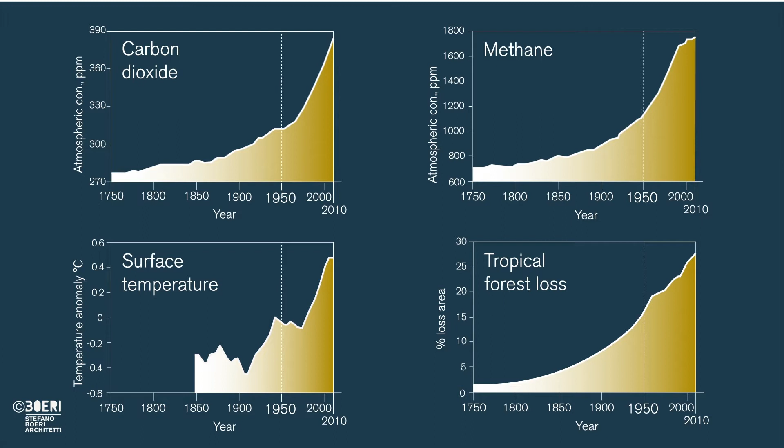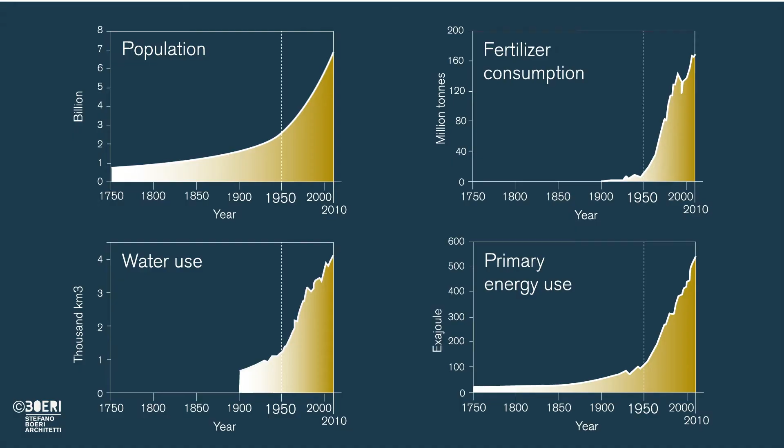As we all know, we're too many. We're consuming mostly everything, and over the past 50 years we've done it in a way that is not sustainable. In the 50s, 29% of the population was in urban areas. By 2050, we're going to be 68% of the population living in urban areas.

So the world is facing not only exponential growth of population, but also the challenge of understanding how this 3% of the world's surface—referring to the surface above sea level, the dry surface—can be rendered sustainable.

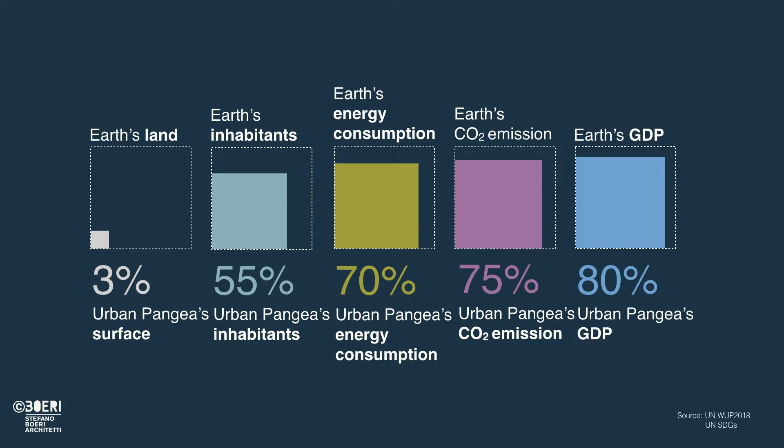What's happening now is that 55% of the world's inhabitants are in urban environments. We're consuming 70% of the world's energy, producing 75% of the CO2 emissions. Worst of all, most of the economic activity of the world is actually in urban environments.

This turns the city into something that is actually a resource. As we see it, it's the place where we have to start—where we can begin healing the planet and turning the environment into a place where we can all coexist.

What we know and what we do is that we don't simply use green as decoration. We treat it as a being. We try to understand its potential, and we try to increase that potential.

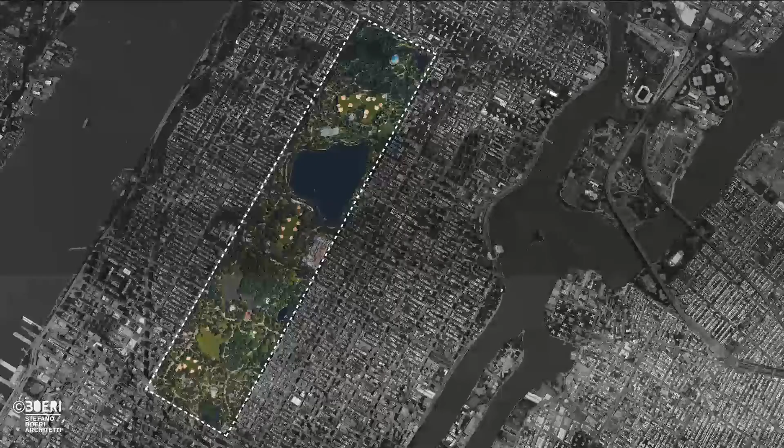A mature tree planted on the ground can absorb 0.4 tons of CO2 per year, can produce oxygen, and can gather water. If we take Central Park, for example, it has 20,000 trees. The Bosco Verticale has 800 trees on its facade.

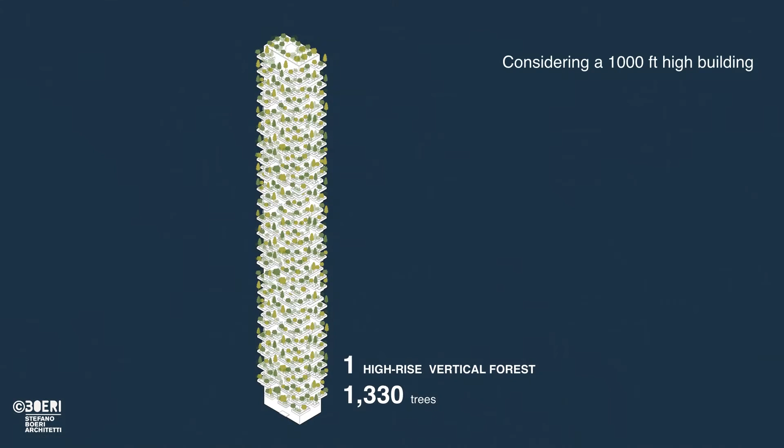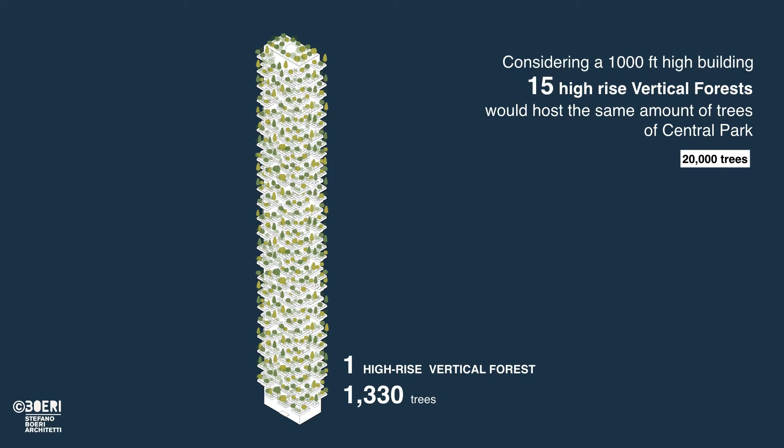If we think of making a tower as tall as the high-rise towers in New York, we can estimate the amount of trees that could actually be on that tower. By building only 15 high-rise buildings as tall as those in New York, you can have the same proportional amount of trees as in Central Park. So you don't really need a void as big as Central Park to increase the green environment within the city.

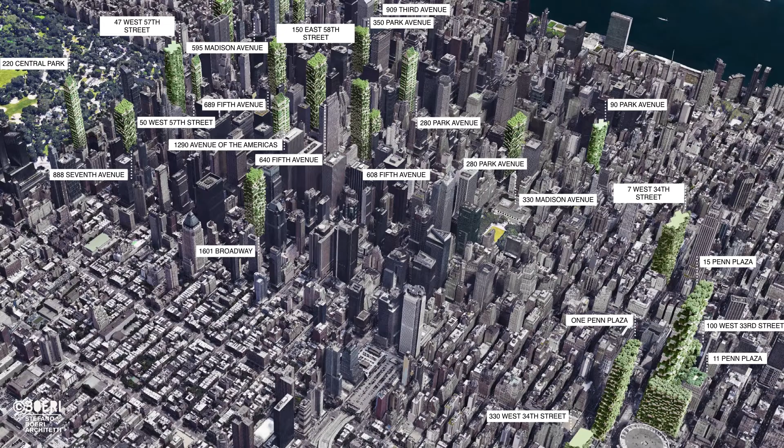So what we've been working on for several years now is a call for trying to bring people to think of ways to turn our urban environment into a green environment.

This is the example we all know, and it's where everything started. In the vertical forest project, architects, engineers, an agronomist, a landscape architect, and many others came together to render this thing possible.

It was a work of research, but most of all, we need to thank our client who gave us the opportunity to do this, because the first reaction we got was, 'You're crazy.' We were speaking of putting trees on the facade—not bushes, not small plants, but actual trees. The Bosco Verticale hosts trees ranging from 3 to 9 meters, so we're speaking of a structural effort and many other efforts to render it possible.

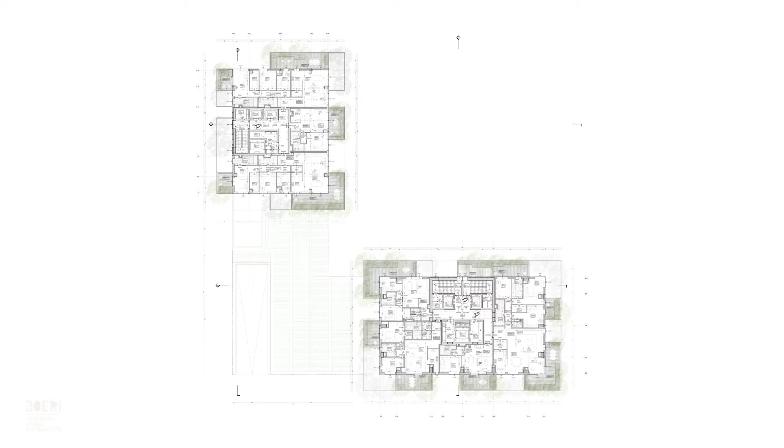It hosts 800 trees and a number of other shrubs and species that rendered the ecosystem sustainable, because we had to find a way of rendering the whole system sustainable, one that could endure and last after a few years. And actually, until today, nothing has died.

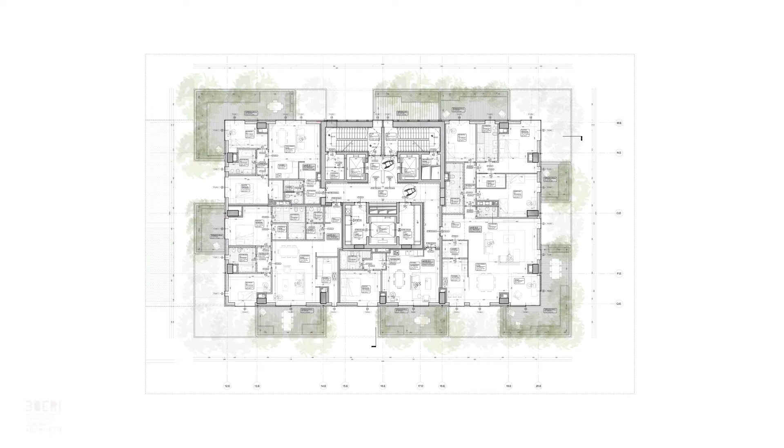So the whole exercise, from the architectural point of view, was to find a balance between the human environment and the natural environment, the house for the tree, so to say.

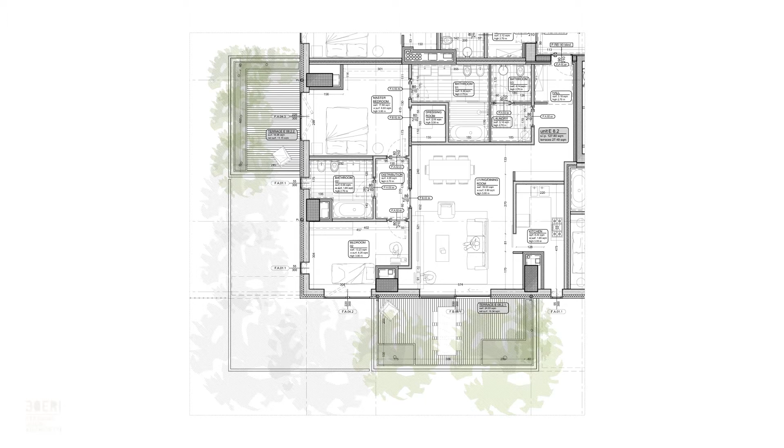We had to understand the dimensions, the distances, the needed space that a tree needs in a built environment. That made us come up with these huge cantilevers you see in Milan, which are the minimum distance you can have from the trunk of the tree to the facade of the building, so both can coexist. We can guarantee the tree is not going to grow in an impossible way, and that the building is safe itself.

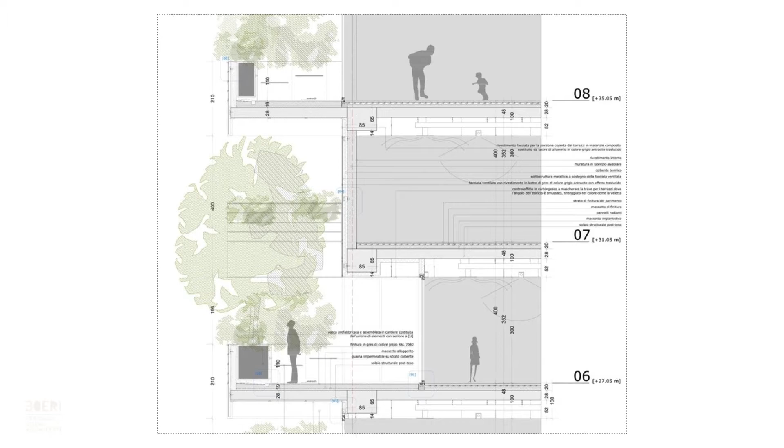That all brought us to this section that I think all of you have seen. If not, here it is, which was the result of many studies where we had to understand things like how the building behaves when there's wind, because it's a 100 meter tall tower.

What could happen if the trunk breaks, how to deal with the watering system, from where to get the water, which is always an issue, and how to calculate the whole system to make it sustainable, economically feasible, and to meet a budget, because we all work with a budget, we are given a number and need to stay within that number.

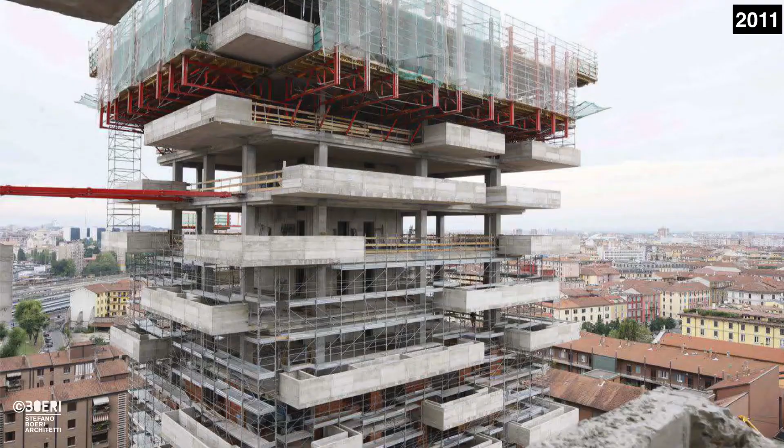So, structure. This is a picture of the building when it was still under construction. The structure is cast in place, a post-tension structure, calculated by Arup. And the fantastic thing about it is that it's as slender as it could possibly be.

So all the pots placed on the edge of the cantilevers are actually not rendering the structure heavier, but the opposite.

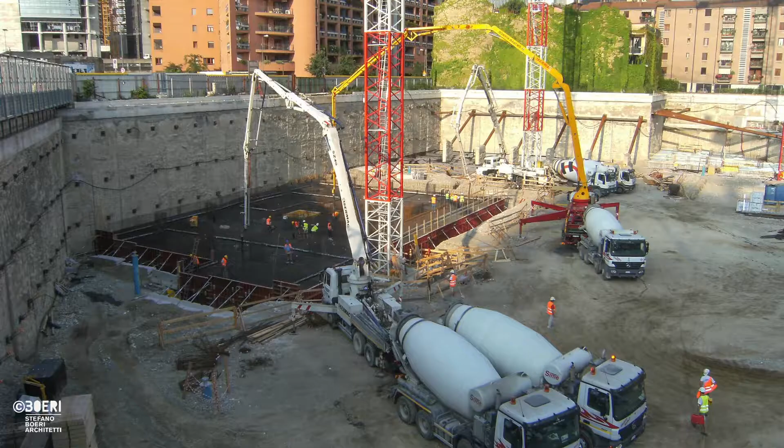Then there was another thing we had to take into consideration during the project: both buildings are seated on top of the metro tunnel. So there were vibrations and other things to take into consideration while building up the whole system.

One final thing we had to take into consideration is the fact that Milan is sitting on water. That was actually an opportunity, a positive thing, and I'll explain why.

So we get to the building itself, the facade. The facade is made by trees.

The exercise was to understand which kind of tree, in which position, how it's going to be planted, the kind of soil that was going to be used, and the fact that we had to use lightened soils so as not to render it heavier on the structure.

Then there were effects like: part of the facade faces north, so there we used trees that are evergreen... that lose their leaves during winter. On the south, actually, are evergreen trees, because there's a need for sun protection throughout the whole year.

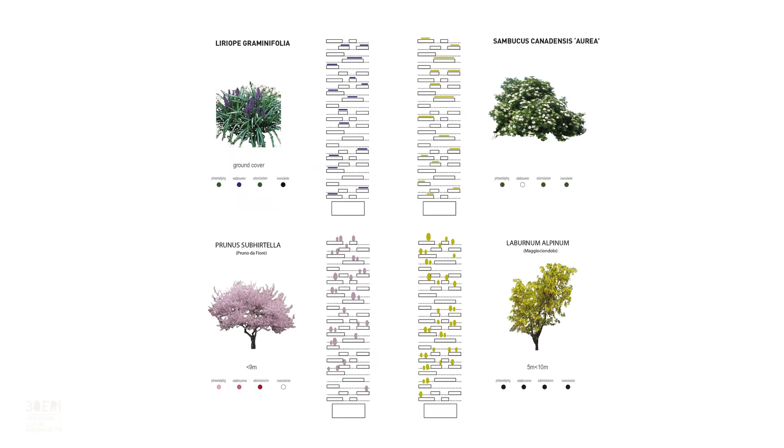Then there is the fact of the wind.

I was very young, but there was a test made in Florida on a wind tunnel to understand a few things about the tree: how it behaves when there's wind, the kind of trunk and shape of the trunk you have to have, and the amount - if the trunk has to be tall, small, fat, or not - because that has an impact on the behavior of the tree when there are strong winds.

Then, of course, there was the fact of how to bind those elements that were 9 meters tall to the structure of the building, and how to actually prevent it, if the trunk breaks, from falling, and other elements.

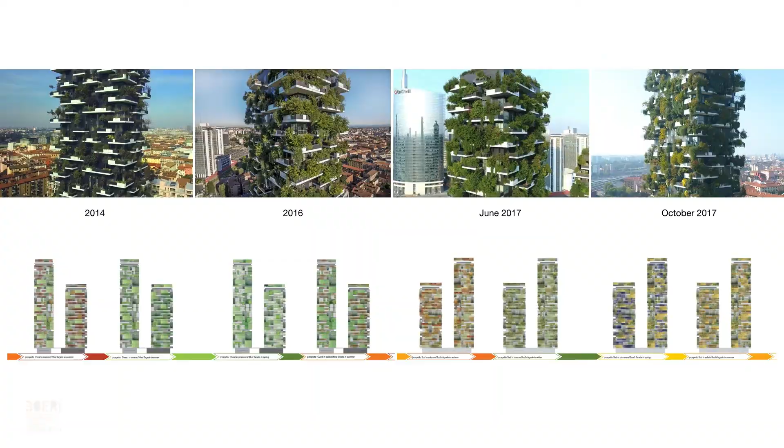As I said before, there was also a study of how this building behaved throughout the whole seasons. As you can see on the slide, here's how the building was in 2014 when it was finished, and how it was in October two years ago. As you can see, the nature is growing, still developing, and we haven't seen one tree fail so far. So how did we manage to put all those trees up there?

First, they were bred on air pots for nearly two years, so they are prepared to live in special conditions. Then, of course, all these trees were chosen one by one by our agronomist, Laura Gatti, and the choosing was made according to the size of the trunk, the height of the trunk, the leaves, and many other elements that, according to her studies, render them suitable for living in this kind of environment. After the wind tunnel trial, she also made some fluid studies of the wind that were then applied to the trees themselves, to understand the correct structure of the tree for it to then be chosen and brought to the building.

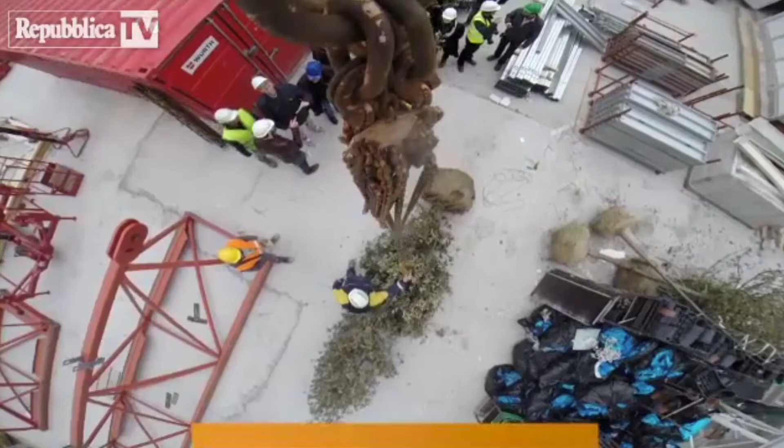So this is one video of the day in which they started putting up the trees on the facade.

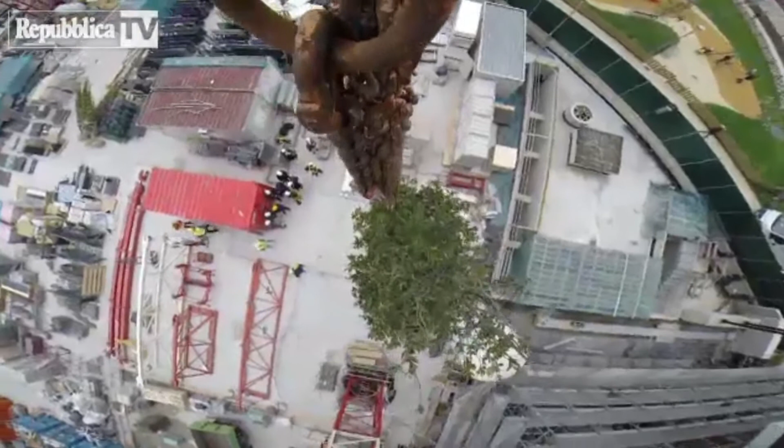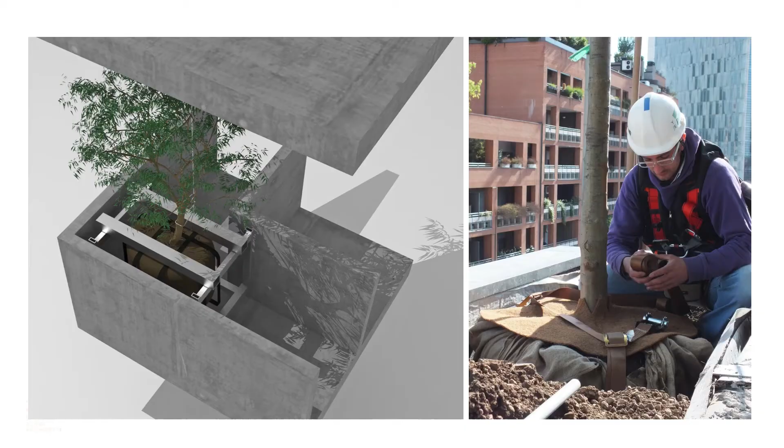And this is how the trees are actually bound. So from the wind tunnel, we learned the shape and size, but we also learned how to attach them to the structure, because there are many different aspects involved. Trees from 6 to 9 meters are bound to the main structure with cages, because we could not rely on the roots of the tree for binding them correctly. The mid-sized trees are tied to the structure with strings.

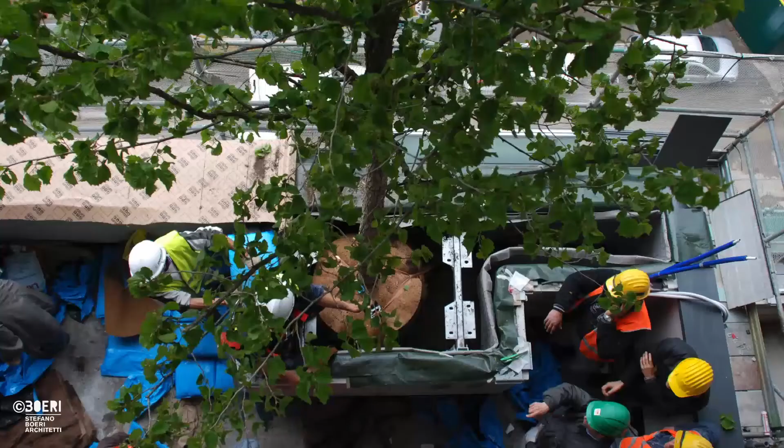Because we knew that the roots, in time, were going to be strong enough to actually hold the tree to the structure. This is actually a picture of one of the 9 meter trees put onto the building, and how it's bound to the structure with strings and metal elements, so it doesn't fall.

Then, as I said, Milan is sitting on water. That actually gave us the resource for the water needed for irrigation of the whole system. So what happens in Milan is that we gather water from underground, it's pumped to the roof, and then by gravity it falls throughout the whole irrigation system, which is a drip system that works throughout the whole year. It's continuous, it's not stopping.

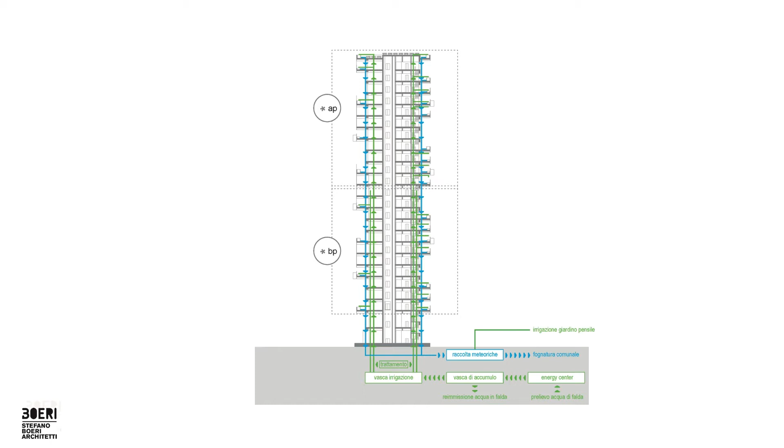And then, of course, together with the rainwater, it's all gathered again and put to the sewage. This is because in Milan, part of the soil water is also used as potable water, so we cannot put the water that comes from the trees back in - it's forbidden by law. That's why the water that is gathered afterward goes to the sewage. One of the points where water is taken out for potable use is quite close by, so it's an area where it's not allowed to put the water back in the soil. So the result is this.

It's a building that works pretty much like a tree itself, creating this kind of atmosphere. It's a place where there is living nature. There are animals, nearly 20 bird species living in the building nowadays.

One interesting thing is that at some point there was some kind of imbalance in the ecosystem that was created, and some bugs and elements where we had to bring them to the building to then balance the whole system again.

And of course, then there is the question of maintenance, which is the big question always. Because there were many moments it was said maintenance is quite expensive. Fact is, yeah, it's expensive, but it is expensive because it's a luxury building. We're speaking of a building that has a 24-hour doorman, spa, gym, and many other things that render it expensive. The greenery, the maintenance of the greenery in the building is only 10% of that cost, so it's not that much.

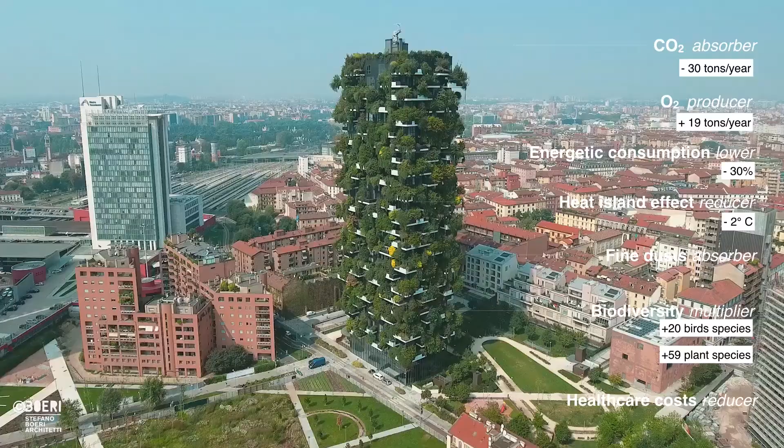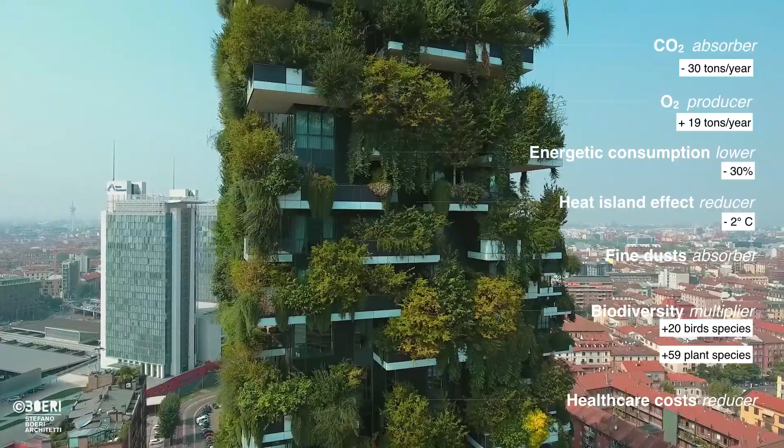So this is the building nowadays, and these are some of the advantages of doing something like this. You have a building that absorbs CO2, produces O2, reduces the energy consumption of the building, reduces the heat island effect, multiplies biodiversity, and above all, it's proven that people living close to green environments are actually healthier. So what you have are the benefits of living close to nature within an urban environment.

So we get to the point of what happened next. What happened next is that we are nowadays having projects all around the world. The approach is pretty much always the same. We take a look at the client request, the environment, the climate conditions, the species that are native, the species that can be introduced, the species that can be reintroduced into the environment.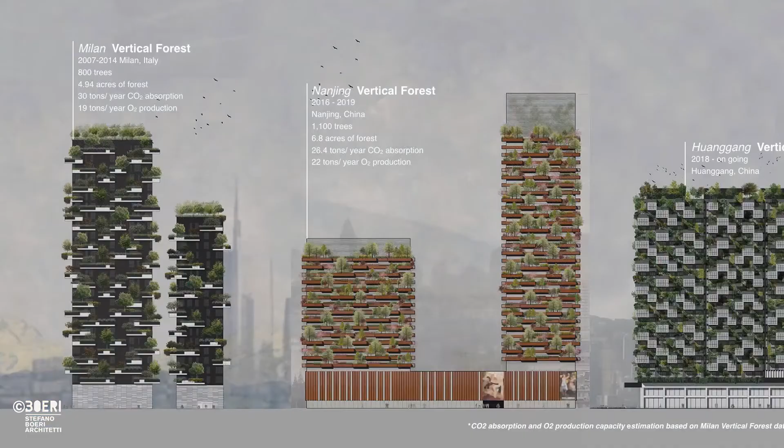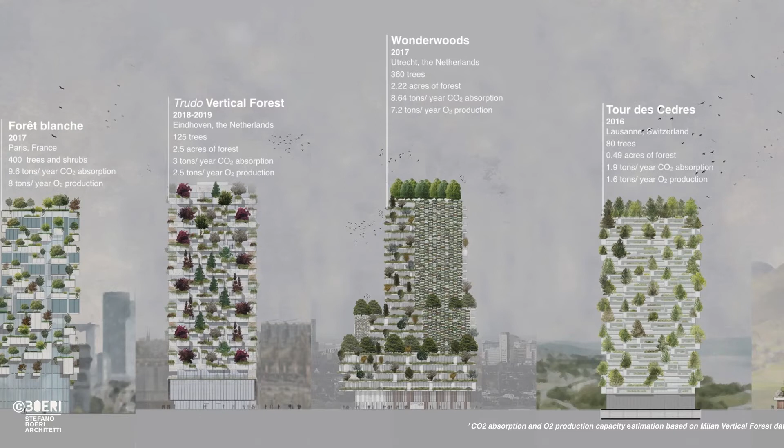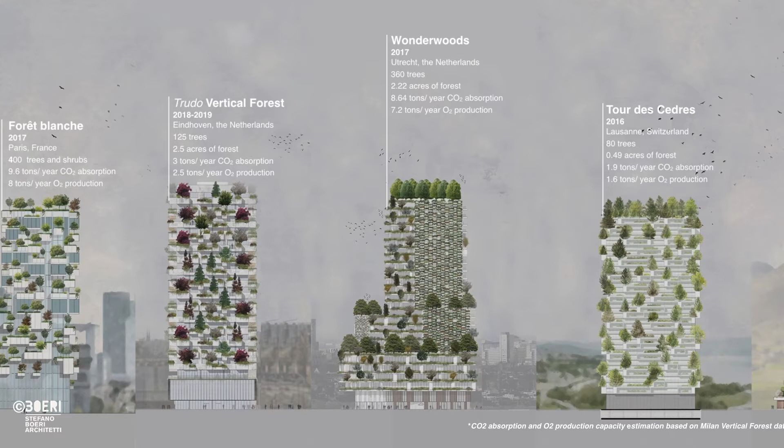And with all of that, we shape buildings that are actually capable of hosting nature. So these are not all the projects, but quite a few projects that we have ongoing now in the studio. Most of them, or a few of them, are actually in China, which is an interesting place because it's starting from zero. So there, from what we've been told, you don't only go there and pick the trees that are going to be in the building, but you need to tell them how to do it. We have to kind of teach them how to grow the tree, how to breed the tree, how to actually prepare the whole technology to then make it possible for it to be built.

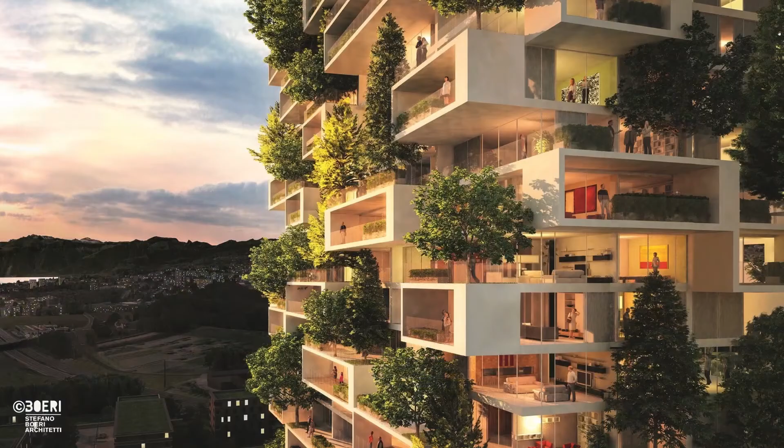The examples brought today, of course, are examples here in Europe, which are quite different among them. So one of them is the Lausanne Tower. This is a competition that we won. It should be built one day.

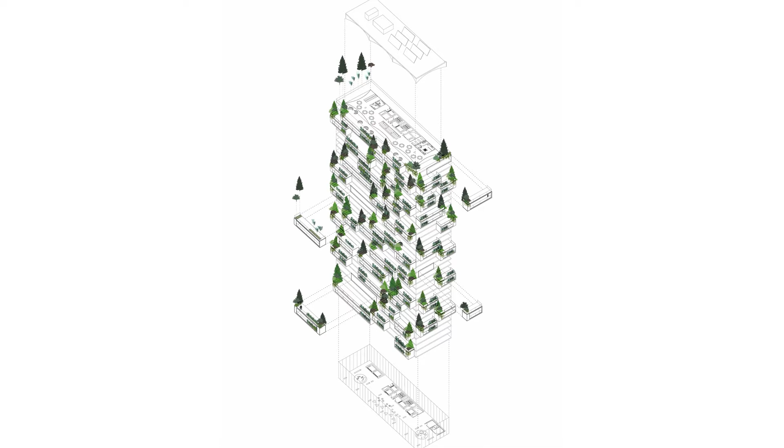This building has a number of trees. The fact is that here the request from the competition was to have large views. We had to create houses that had to look over the city with no barriers. So that brought us to think in a completely different way of actually holding the tree or creating that space for them. These are the species that were chosen, which are all from the area. And then here is the structure.

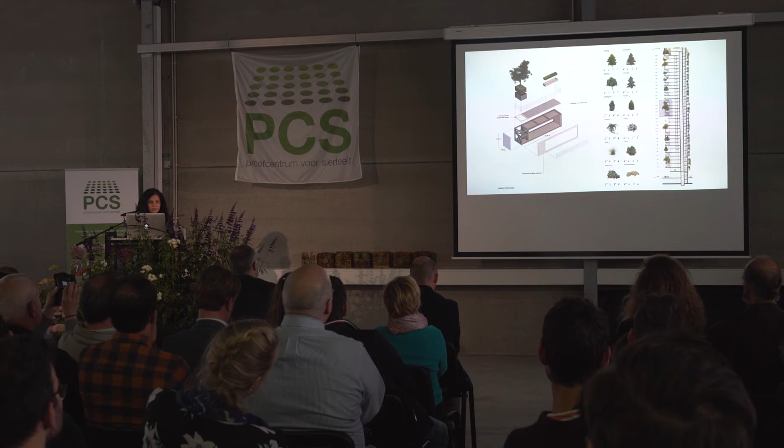Here it's completely different from Bosco. This is a prefabricated structure made in metal, where the tree is not actually making a handrail or popping up, but it's actually at the level of the ground level, so you actually get to see the whole element. And above all, it's a building that is much more transparent than Bosco. The need for sun in Lausanne is much more.

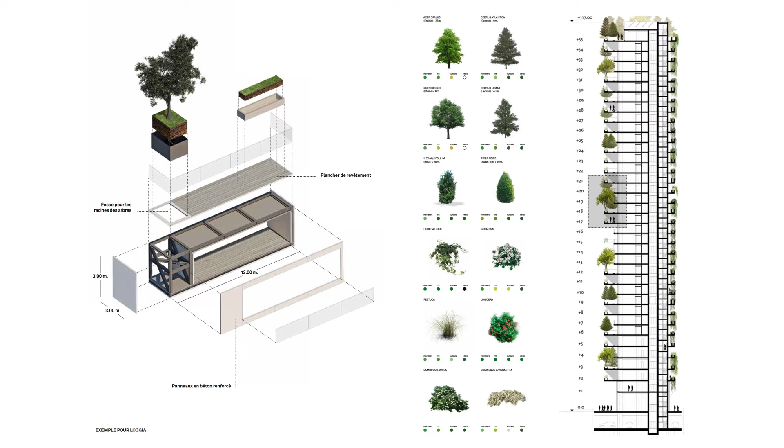It's much bigger than the one we have in Milan, where during winter it's very cold, but during summer it's very hot, so there has to be a balance. In Lausanne it's quite different.

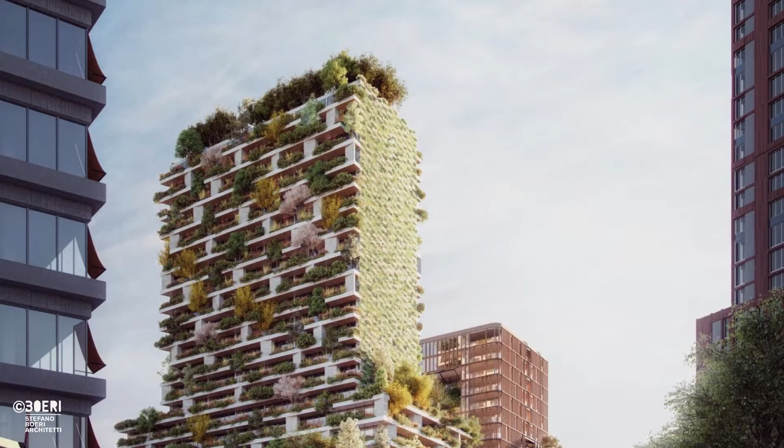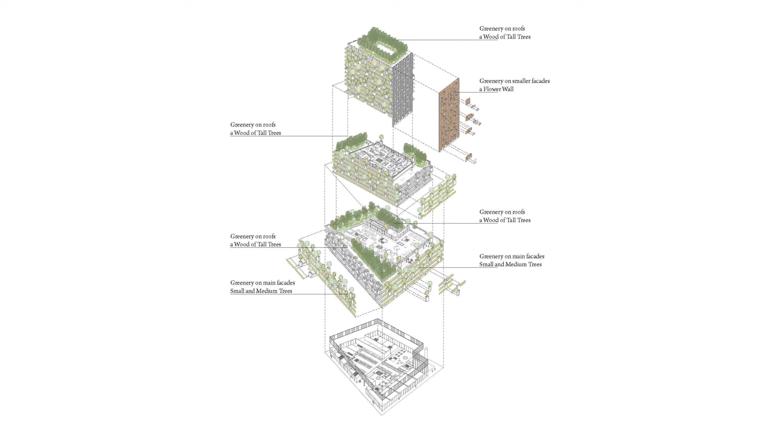Then we have Utrecht, Wonderwoods. This building hosts nearly one hectare of forest on the facade. In comparison, the whole study for the green environment was made to actually introduce species that were native to the area but weren't there anymore. Part of the study was figuring out how to bring back the species that were there but not anymore, and do it through the building itself.

On the development of the project, there are some other aspects, like they are studying a way of reducing the amount of mosquitoes in the city during summer, using other natural elements. So they're actually doing a big effort to use nature to enrich the ecosystem.

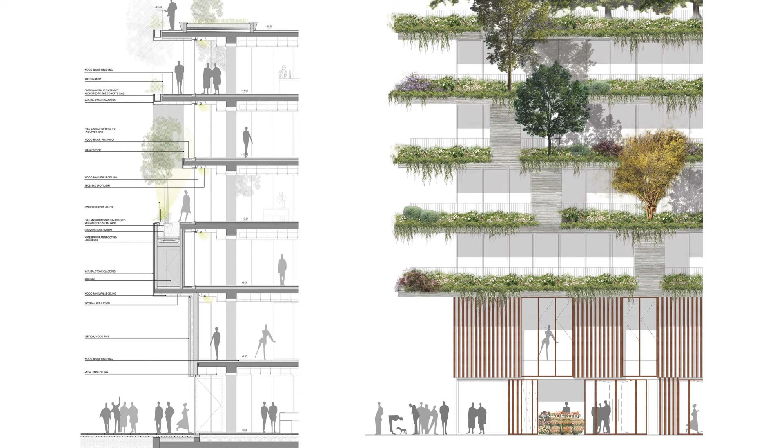In here, the structure that actually holds the tree is a pot that then turns into a sort of storage space. That renders possible the fact that all the green you have - instead of, in Bosco, you have one thing as tall as me, with my head outside, to guarantee there's enough soil and substrate for the tree to live.

So here, what was made is that all that height that's actually needed was brought to the floor below, so you can have the feeling of the greenery right in front of you, but at the correct height - the height of you when you're standing. You can look above, not from down below.

So here's a section. Normally, what we try to think is that for a tree, 80 centimeters to 1 meter of soil is needed, more or less.

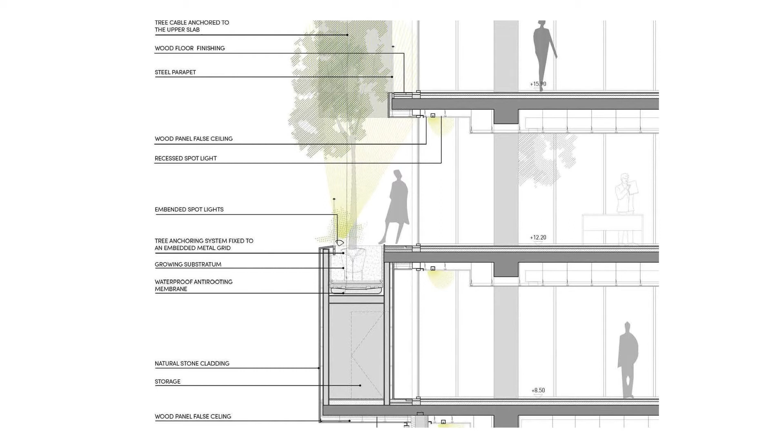What we do is adapt the details to studies of local rules and regulations, so nothing we do is actually invented. We study the local law, make reference to it, and then adapt it to our buildings. This is done for all the buildings, even for Bosco. Every country has its own laws, and we have to make reference to them - that's how things are made.

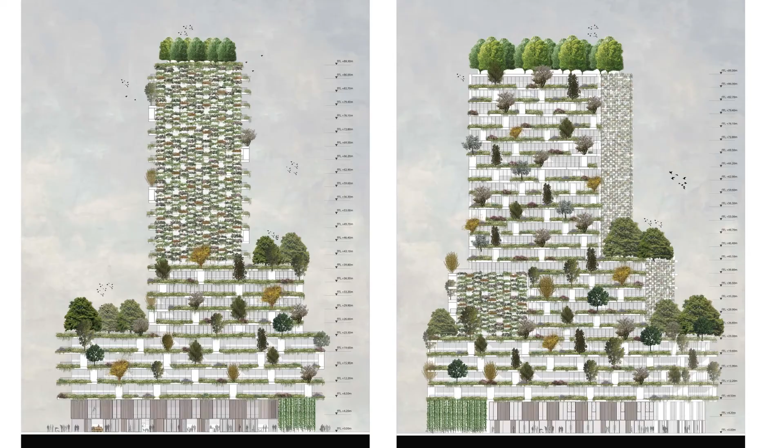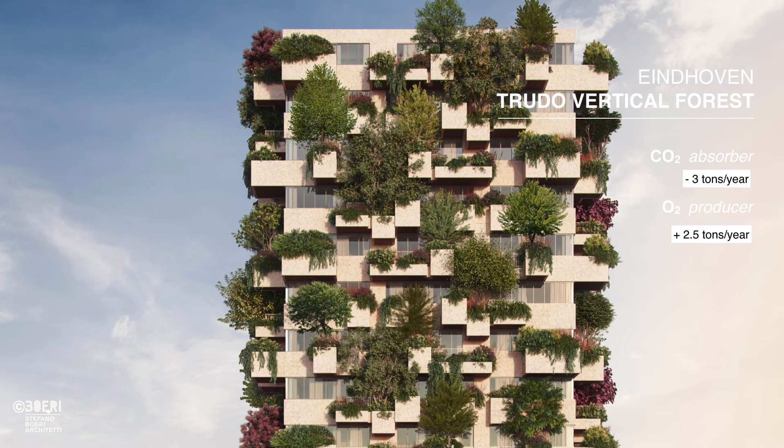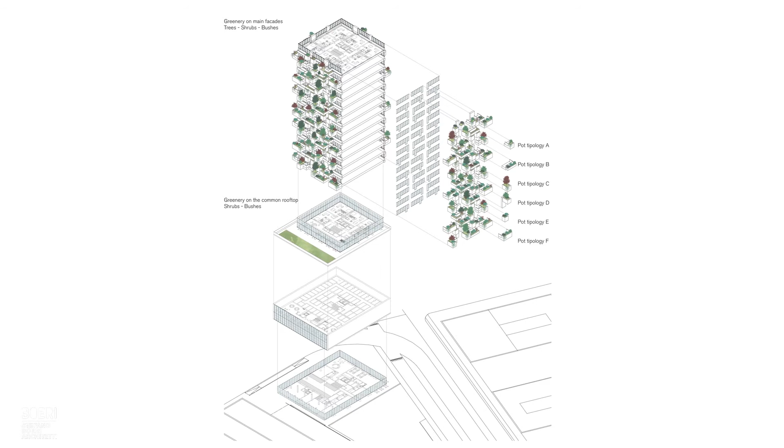Then I think this is one of the most interesting examples we have, because it's social housing. So we came from Bosco to something that has to be way more sustainable from an economical point of view. The whole study was made to understand how this structure could be cheaper, much cheaper.

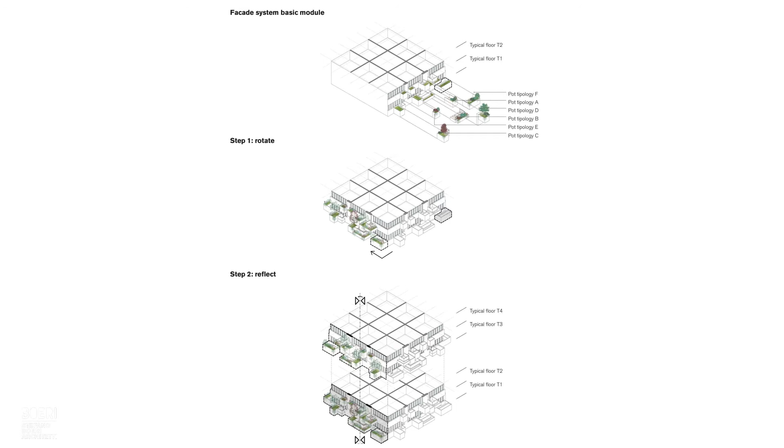The typologies of apartments were one aspect, and it's all very modular, but the most interesting thing was the facade - how to bring trees into a facade that has to cost way less than what we did with Bosco. So here we have a series of precast pots placed on top of a concrete structure that is being built as we speak.

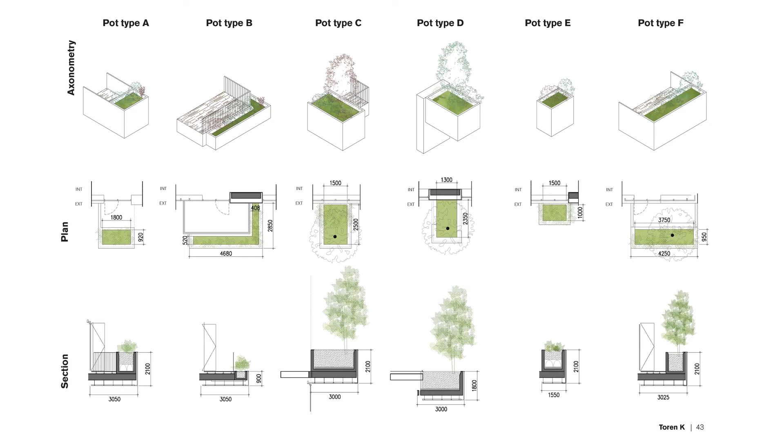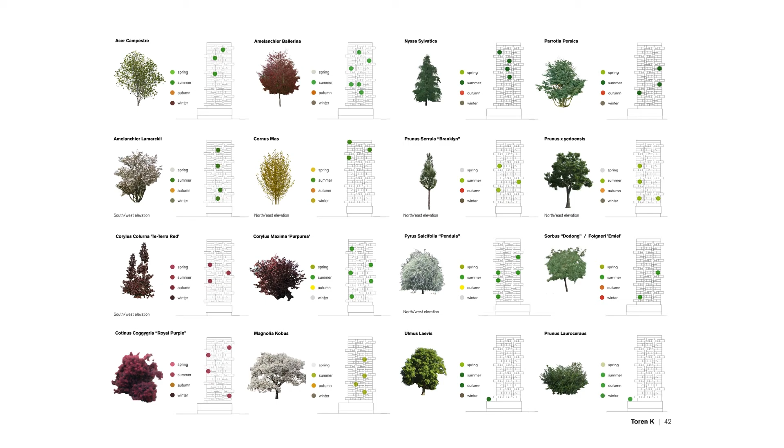That, according to its dimension, shape, size, and position on the building, renders possible different sizes of trees, bushes, and smaller green elements. These are part of the species that are going to be placed on the facade.

And this is the difference: Bosco cost $2,700 per square meter. Trudo Tower has to cost $1,550 per square meter. So the difference is made through the study of a prefabrication system that renders this difference possible. Bosco, of course, had a completely different target when it was assigned to us - they were asking for a luxury building, so the target was different.

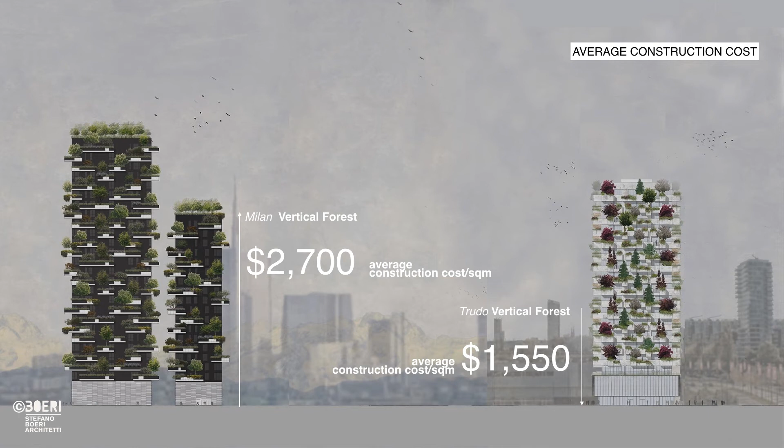This one is another story. Part of all the effort we've made is also to take all that we learned from Bosco - all that we know from it nowadays, because we're still monitoring the whole building, the facade, and the green environment - and use all that information in other projects to see how we can improve it, render it more sustainable, cheaper, and easier to build.

Then finally, there is Palazzo Verde, which is the building that we are doing here in Belgium. This building, seeing all the ones I showed you before, is different. But this is what happens when you do architecture - every project is a new project, every client is a new client, and every environment is a completely different environment.

In here, what happened is that the request was for a low building. The budget was quite different, the target also. At some point this building actually had trees on the facade, but then understanding the maximum height, the maximum body of the building, the maximum of everything we could actually have, we came to the conclusion that we had to look at it another way - how we could shape the body of this building to host trees and create a large green space.

So from an individual tree or individual green environment, one thing I forgot to tell you is that in Bosco and all other projects we do, the maintenance of the green system is not made individually. It's not trusted to the single tenant - it's actually seen as a common good. Everybody simply pays the fee that is to be paid, and it's made globally. It's not like you can go outside and decide to cut your tree and walk away. It's an ecosystem, a very delicate system. So it's very important that in this kind of building, the green sphere is treated as a common good.

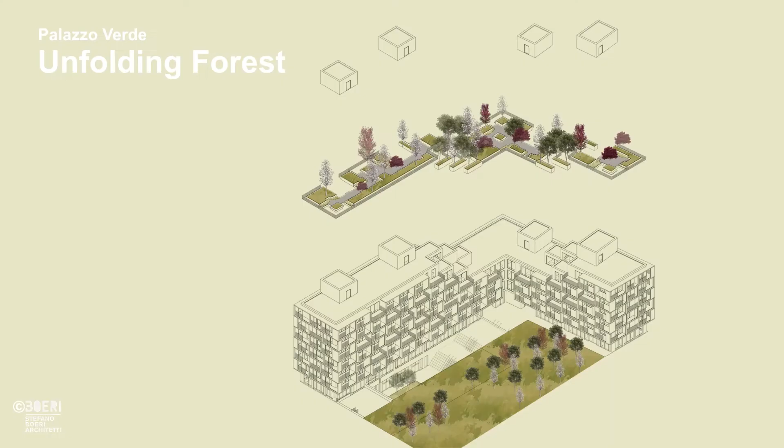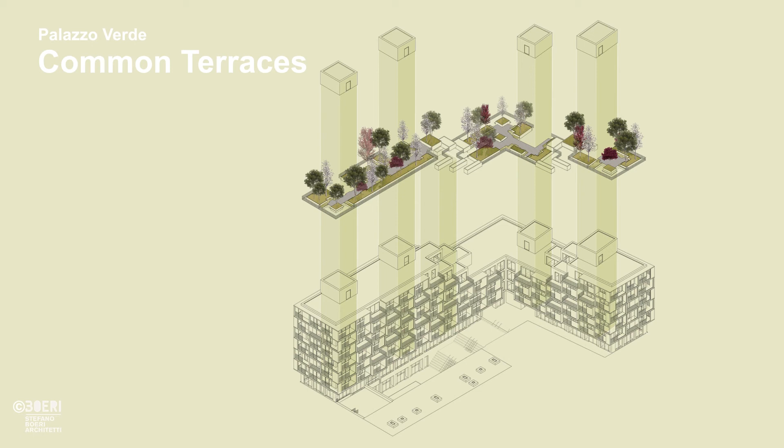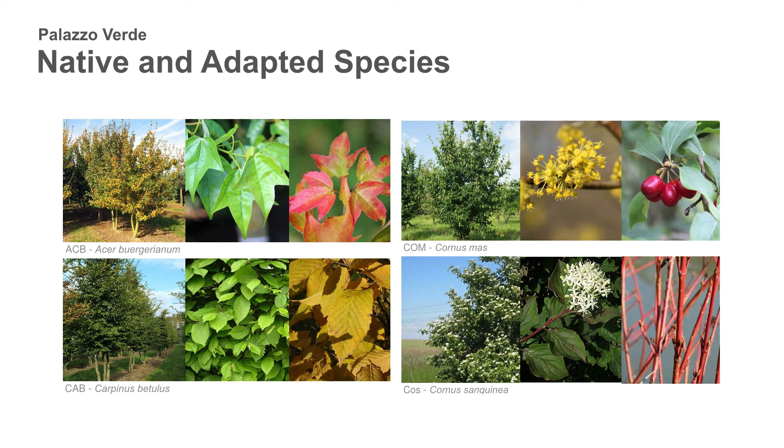This is where things got very interesting, because we worked with our agronomists to understand which species we would like to place in the building according to our ideas. When we faced the client and the people actually realizing the green roof, we discovered there is a blacklist for trees, and we had quite a few of them on our list. So we had to adapt our ideas, find other trees that could be suitable, and finally came to the 86 trees that are going to be in the Antwerp Palazzo Verde rooftops.

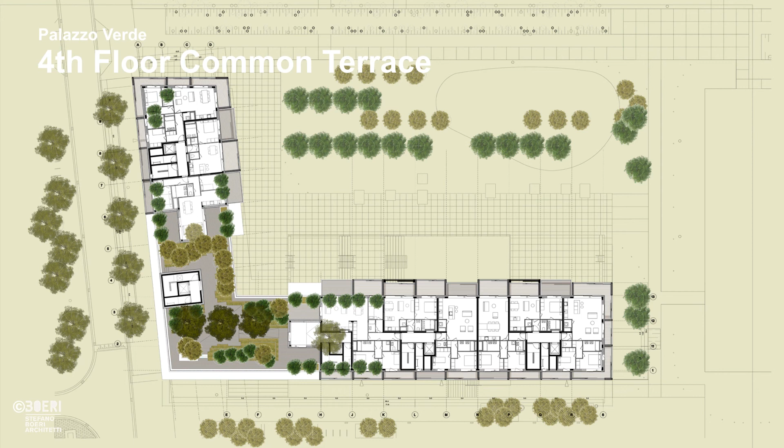So on the 4th floor there are nearly 350 square meters of green roof. On the 6th floor, if I don't remember wrong, are around 250, and the difference to the 700 I mentioned before is on the 7th floor.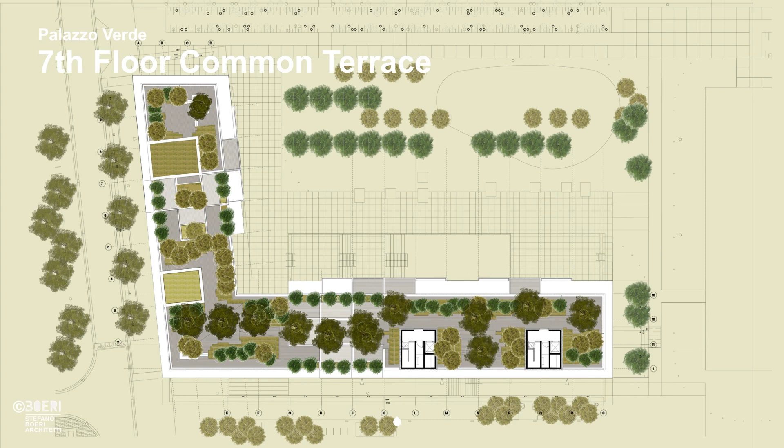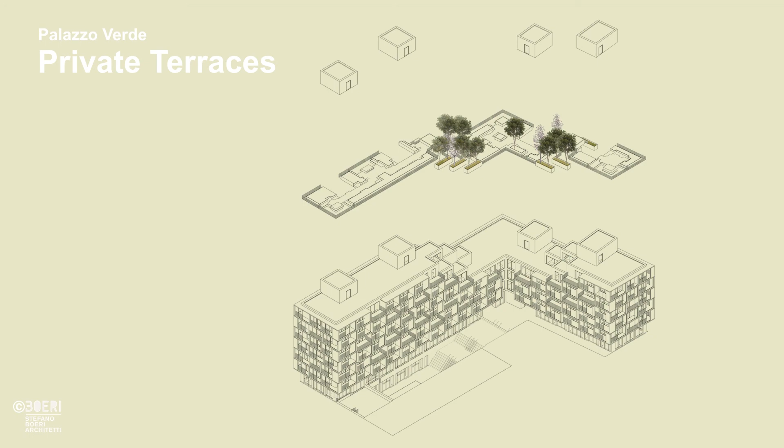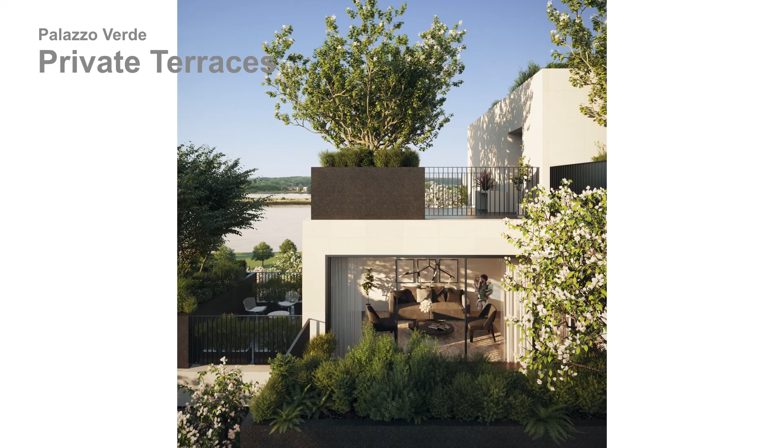Then there are the private terraces, which is the moment the building again changes its shape to grant space to a green environment. The steps created that you see on the facade are spaces where we are thinking of having very big trees, accessible to I think 7 apartments directly connected to private terraces. Here again, the green is not thought of as individual good, it's a common good - so in theory, legally, you own the terrace but you don't own the trees. The trees are a common good to all the owners of the building. This is a view of one of the private terraces.

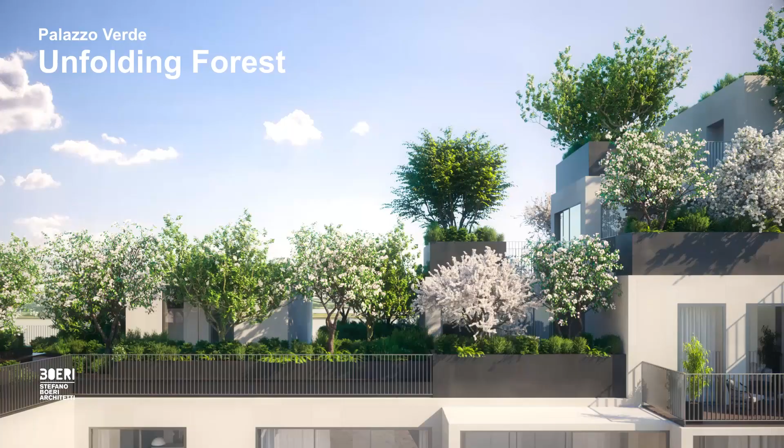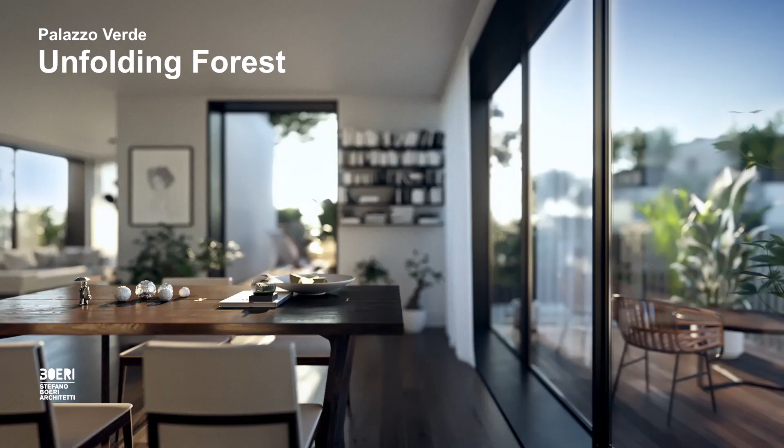To finish, this is a promotional video made by our client where you can see how the whole building works - a view of how we imagine the roof terraces to be, and how the whole building enjoys being close to a green environment, quite wide open, which grounds you with the feeling of being in a countryside environment while actually inside the city.